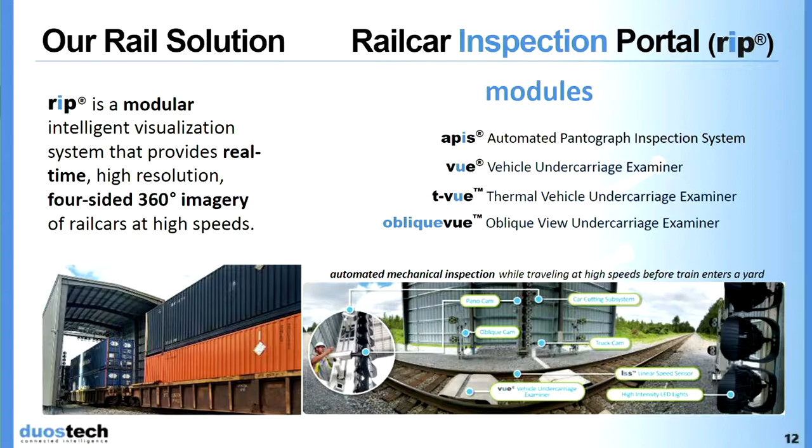And so we'll show you this next - explain to the viewers about the rail and how that actually works, because I think people don't generally understand. They think it's just some cameras taking pictures, but it's much more than that. It is much more than that, Adrian. Very much so.

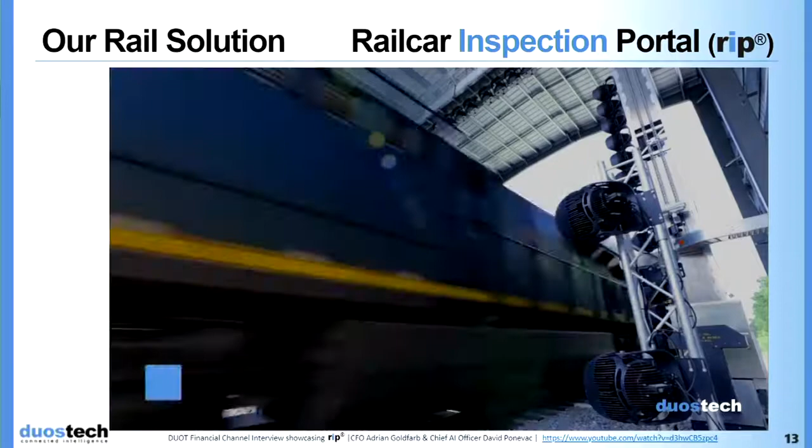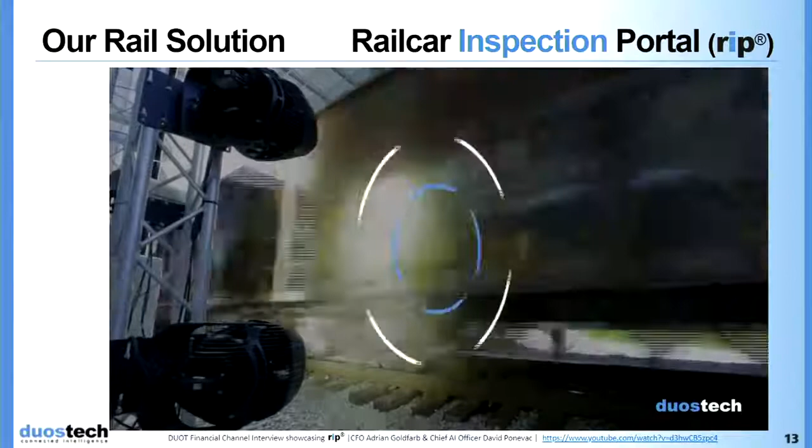Imagine a portal - any fans out there of the movie Stargate, where they're going from one side of the universe to another? It's a portal like that. The train zooms through the portal, and there are a series of sensors around that perimeter, right? You've got cameras looking down, cameras looking at the side, cameras looking at the bottom, and other sensors - lasers, vibrational sensors - that surround the train, 360 degrees.

And as the train goes through the portal, main line, by the way, so this is at speed, we collect various types of pieces of data that are then glued together and shown to the customer. And this is all in near real time - you're talking delays of milliseconds.

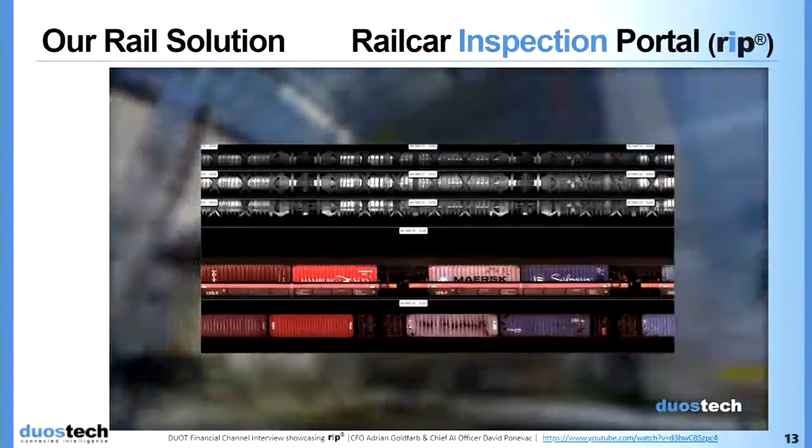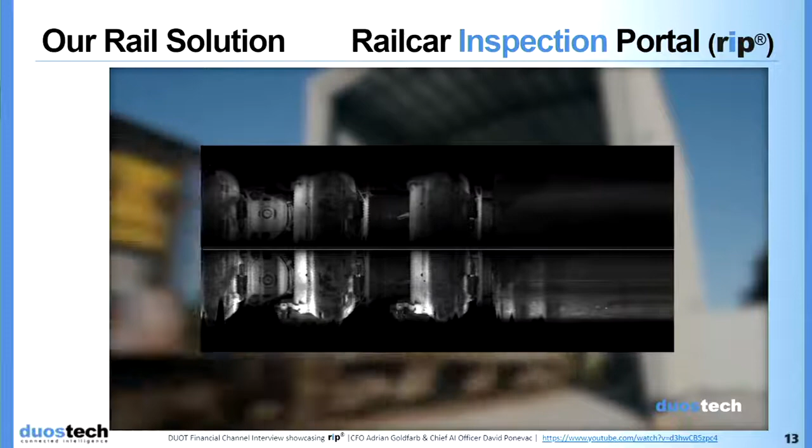So within milliseconds, you assemble those individual line scan stripes into panoramas for each rail car. You also pair it with obliques, because we not only have line scans, we have oblique cameras that are looking at the weird, odd angles that are normally not seen perpendicular to the car. And then we have other pieces of data, like laser for profiling, or vibrational data that we use for strikes - if the train is dragging equipment or something, you want to know. It is a serious problem for the railroad.

So once the train zooms through, we assemble each rail car and show it on the interface. By the time the train leaves the portal, everything is laid out for the customer to see.

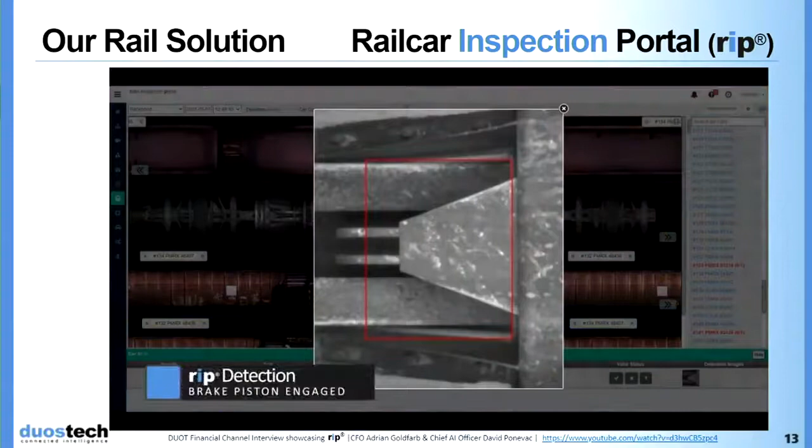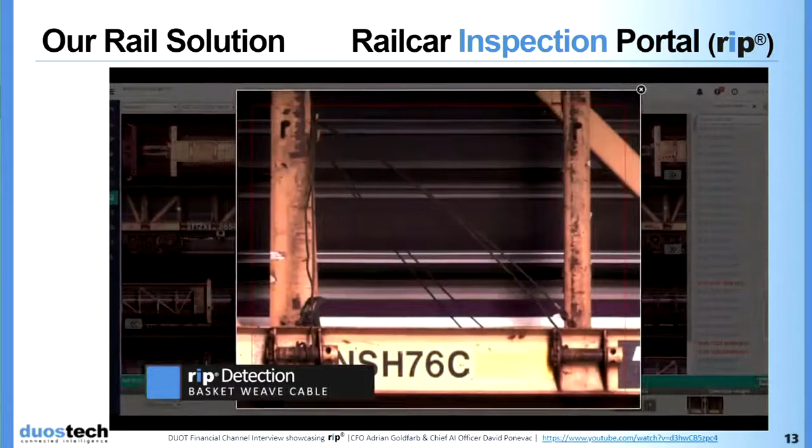Now, as the train is passing by and those individual images are generated, we also send them to the AI for processing, because we have to have the results within 15 to 20 minutes of the train departing the portal. So those images are gathered real time, sent to the AI for processing, and then detections are packaged and sent to the customer for analysis. That is sort of the high-level overview of how it all works together.

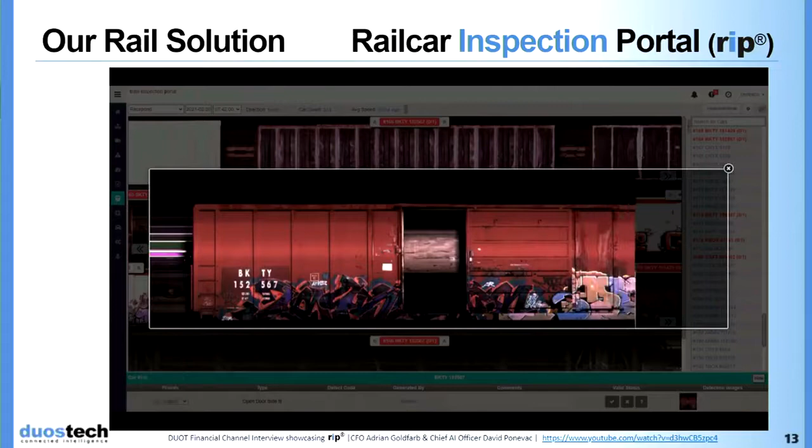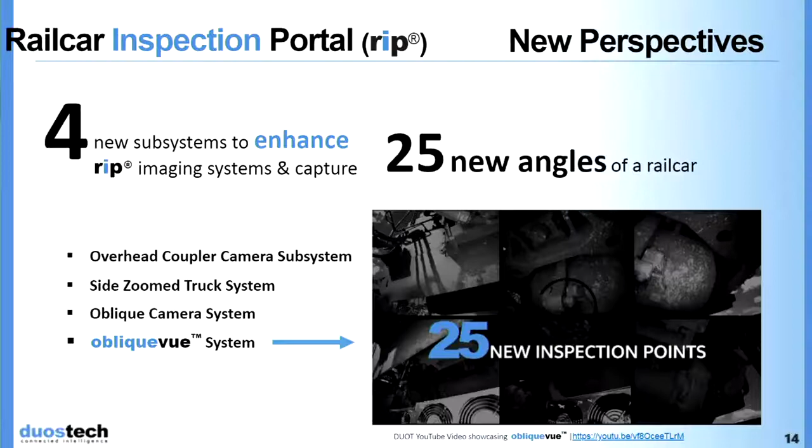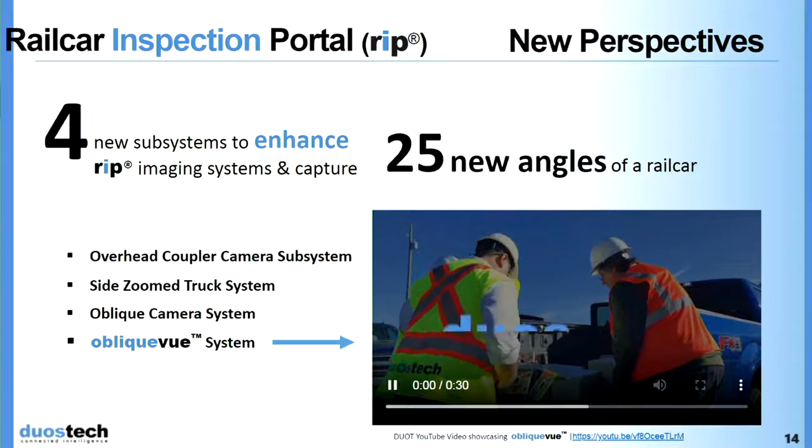One of the things we wanted to also show today is a new solution that we've developed called our obliquevue, and basically this is on the underside of the rail car. We'll go ahead and show you a brief video of this.

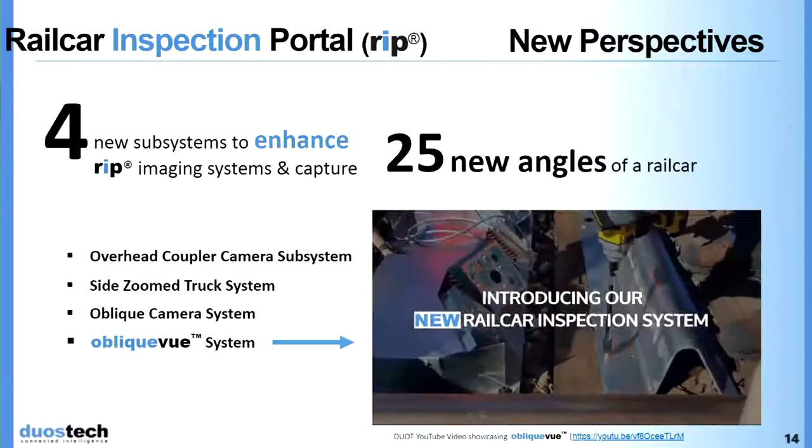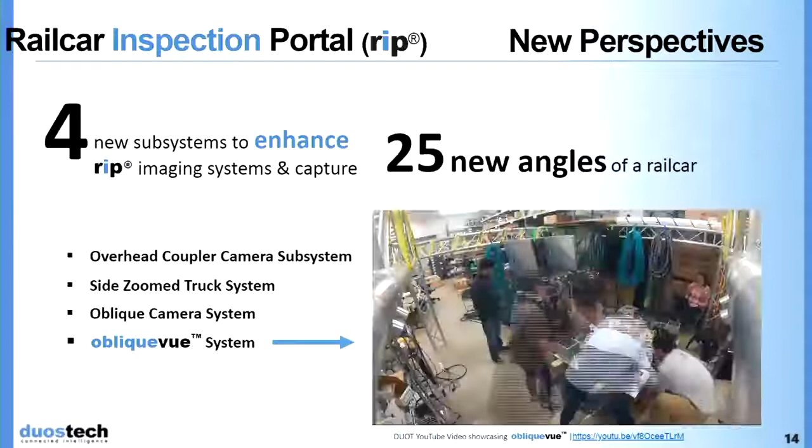This is our engineering team out doing a live test at one of our nearby rail inspection portals, and what you can see is we're now inputting the device into the track. You can see how literally the train rides on top of this. You can see basically 10 cameras looking from one angle, or 5 cameras from one angle, and then another 5 cameras from another angle.

It can see an additional 25 inspection points on the underside of the car, and one of those inspection points is called an F pin. It's a particularly difficult pin to see, and it requires a mechanical car inspector to actually get on his hands and knees, get up underneath the train to see that. We can see that automatically while the train is going at high speed.

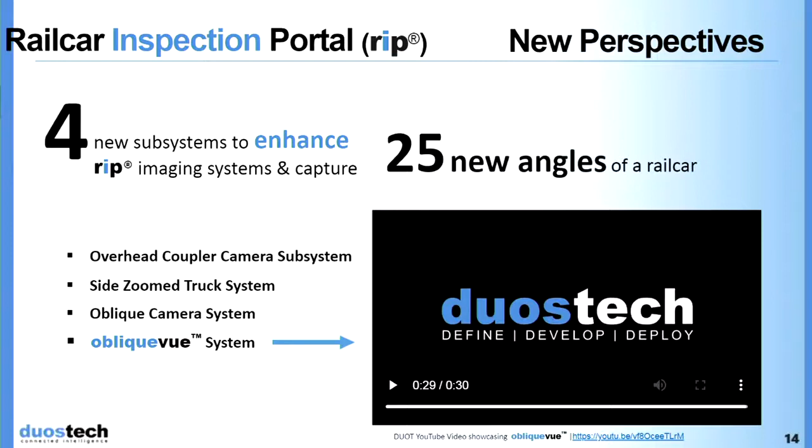And then this next video here will kind of show you a bit here about the obliquevue.

For our customers, they have to inspect numbers of different items to keep their trains healthy. It takes a lot of man hours to do manually, so we build machine vision systems that do it for them. Either it gives them pictures so they don't have to be there physically, or it takes the pictures and runs them through an algorithm and finds the stuff for them. And it inspects the parts without them even being in the loop, and just tells them when there's a problem.

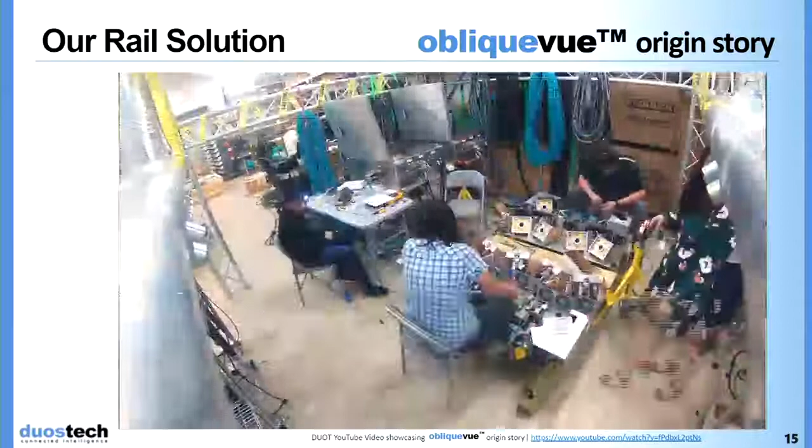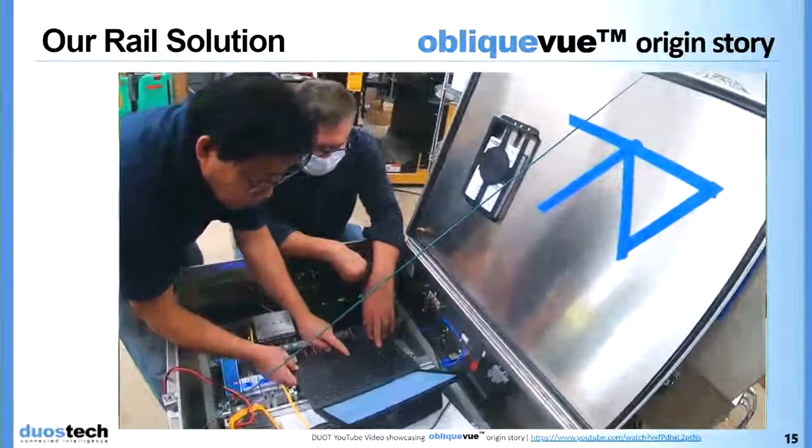Our team mobilized. We integrated in a way where we were able to communicate multiple times a day with all of the relevant SMEs on hand at all times, so that there was no time wasted. We had enough time to do multiple iterations, make sure we got rid of the stuff that didn't work, select the stuff that did work, and everybody was active and present so that nothing was missed.

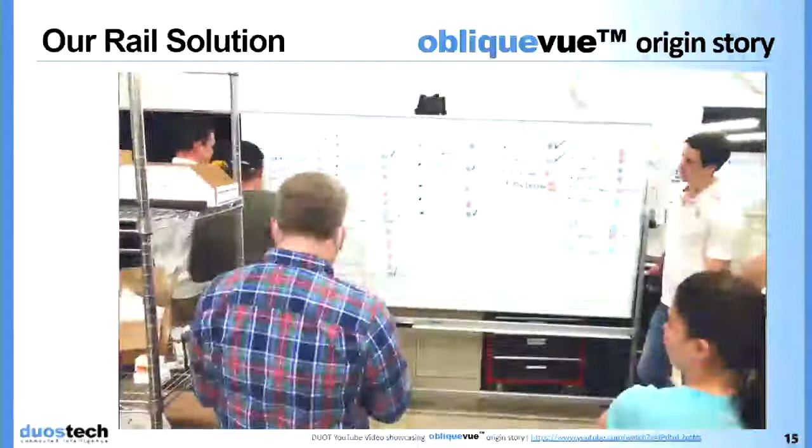Some key leaders stood up. We had some engineers that actually started from scratch. They took whiteboard lessons learned and they just started documenting.

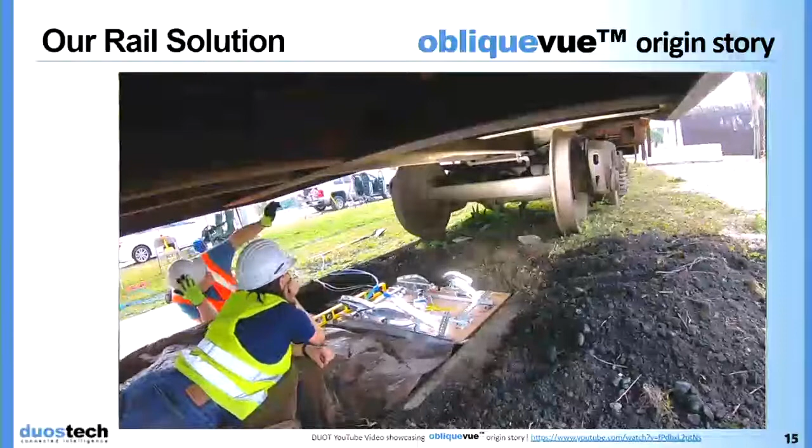So it's very difficult to inspect. You have to actually crawl underneath and look at specific things from different angles, which is an awkward position to be in. So we put cameras in that awkward position so that the people don't have to be. There are many safety issues and concerns about people getting down and bending down and so forth, and it's also very difficult to see this.

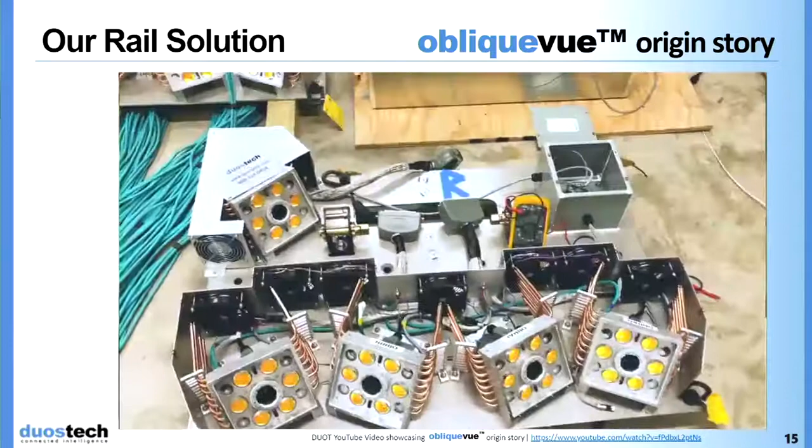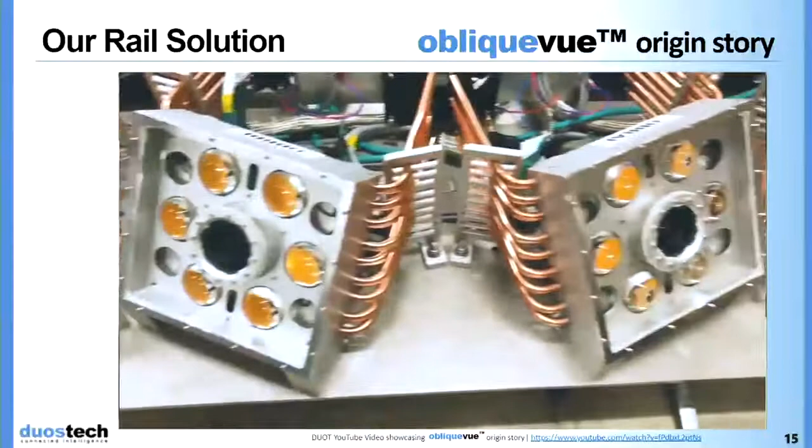So what we have been able to do is develop a new obliquevue that is underneath the train looking at different areas. We had to put multiple pose angles, so different cameras, under the train to see all the different things that the customer wants to see, which meant we had a very small space, a very tiny volume to put cameras that aren't big, but lamps that are gigantic compared to the volume.

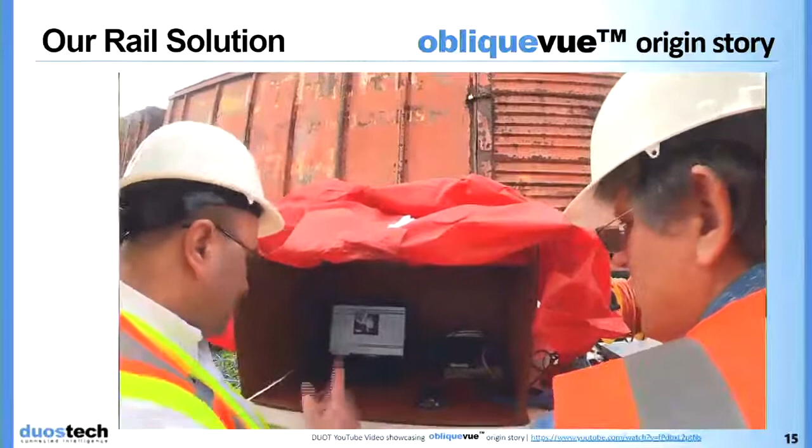These lamps, when they all turn on, are roughly twice as bright as the sun. We have a total of 10 cameras. These 10 cameras are dedicated towards certain aspects that the customers ask us to look at for certain safety concerns or issues that they want us to look at specific targets. Through a lot of trial and error and calculations and analysis, we figured out what we were going to build.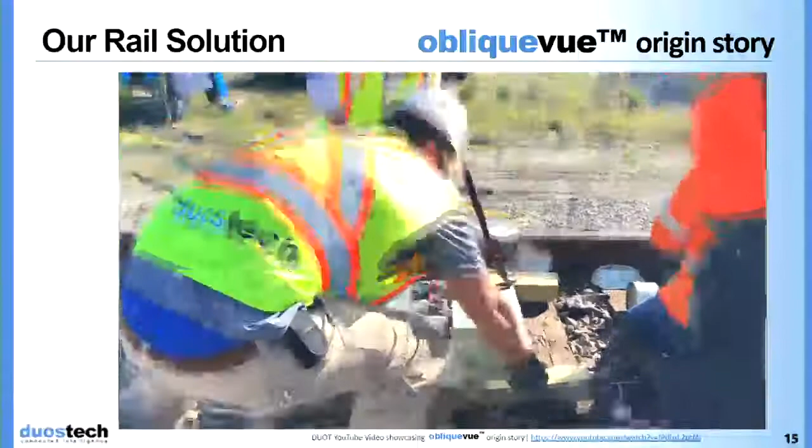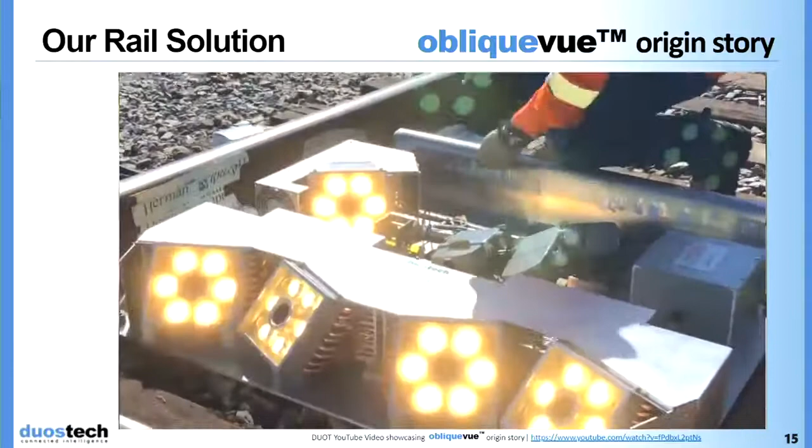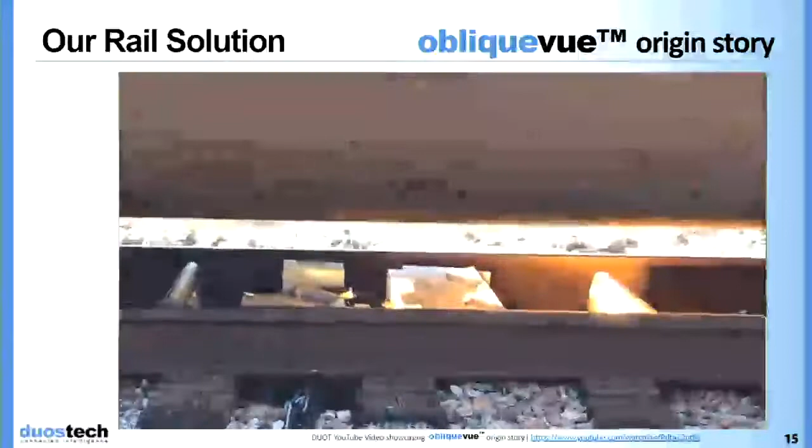Compared to what we've done in the past, and compared to the view which sits on the tracks and looks straight up instead of at different angles, we tried to solve a problem we've had for a while. So what we did was build an illumination system that surrounds the camera, putting light on all sides while keeping the illuminators very close to the lens, so there's almost no shadow in the images acquired. We did an amazing job in a short amount of time to produce a system our customers really will like. As of today, our system is in production. It's live, capturing all the detailed images our customer needs.

Obviously we're pretty excited about this new obliquevue. This was developed by our team of engineers in approximately 75 days, which is very, very fast development, and I'm really proud of the team and the talent we have.